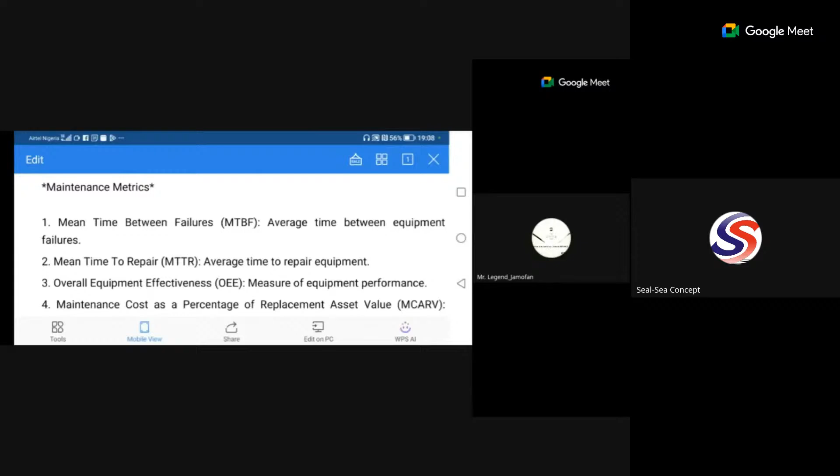So let me share the screen from this other device. We will look into this calculation very briefly. I think I still have the page. So we'll look into this calculation together. I really want you to please give me your undivided attention in order to really get this calculation once and for all.

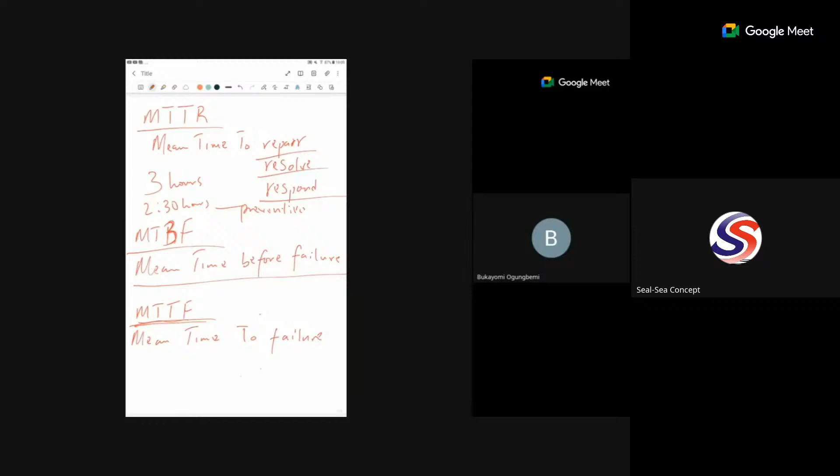So I'm going to be using some illustration. I explained yesterday, some people will call this mean time - you can see it as mean time between failure or before failure. Okay, so I choose to call it mean time before failure. So let's first deal with what mean time before failure means.

So let's say we have a machine that runs - the uptime of this machine is actually 10 hours. So I'm going to write that uptime equals 10 hours. So the company actually proposed to run this machine for 10 hours. And let's say within that 10 hours, we have some failure that occurs. Let's say failure, and let's say this is downtime.

So the first failure occur, and we have another failure that also occur here. This failure that occur here lasted for 2 hours, that's the downtime. And the failure that happens here lasted for 1 hour.

So from this, we can easily see that our total operation time will definitely be that. Yes, our uptime, or let me say our proposed production time, let's use that so it will not mislead us. This is the operation time. The company actually wants to run this. They need this machine to run for 10 hours.

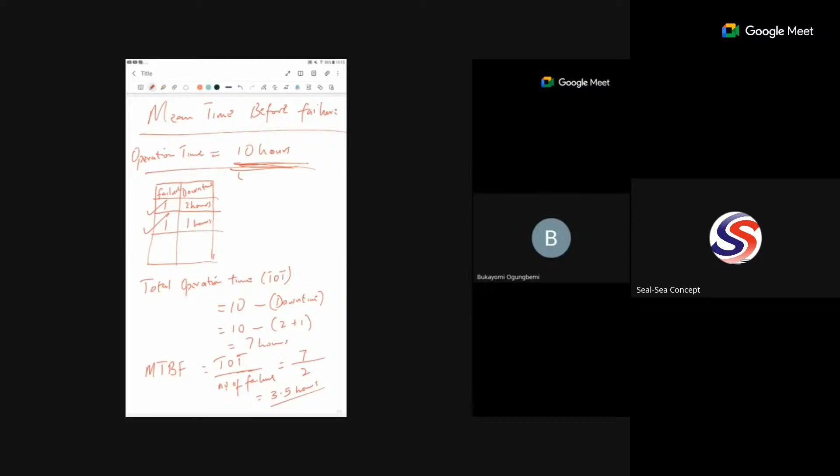By this calculation, this is how a company actually predicts the reliability, this is how they calculate the reliability of every machine. Every manufacturer also does this. And sometimes when you are talking about industrial machines, we care so much about MTBF. But if you are talking about consumer goods or consumer machines, most of our domestic machines, most of us don't really look at MTBF. We don't really care, because we don't need them to run for a long time, okay? Or we are just looking at the low cost of that particular machine.

But every company wants to know for how long can this machine sustain me. So you can imagine what is the interpretation of this now. It means that this machine will always fail at every 3.5 hours. Once this machine runs for 3.5 hours, it will fail. That's what MTBF that we have calculated actually means. So it means that the reliability of this machine is based on 3.5 hours. That is, this machine, when you power it on, when it runs for 3.5 hours, it will just go off, it will fail.

So we are using hours to calculate this. So in case the hours become much and we run it into days, that's when the company will say, okay fine, we have known that this machine will fail every 3.5 hours. Don't forget, every 3.5 hours, this machine will go off. Then we go to preventive maintenance. So on this machine now, we explained yesterday that preventive maintenance is a scheduled maintenance. So because we have known that this machine, every 3.5 hours, it will go off, and mind you, we needed this machine to run for 10 hours, in order for us, if we don't have a better machine to replace this machine with, we can now say that every 3 hours the machine must be shut down for maintenance. So you see that.

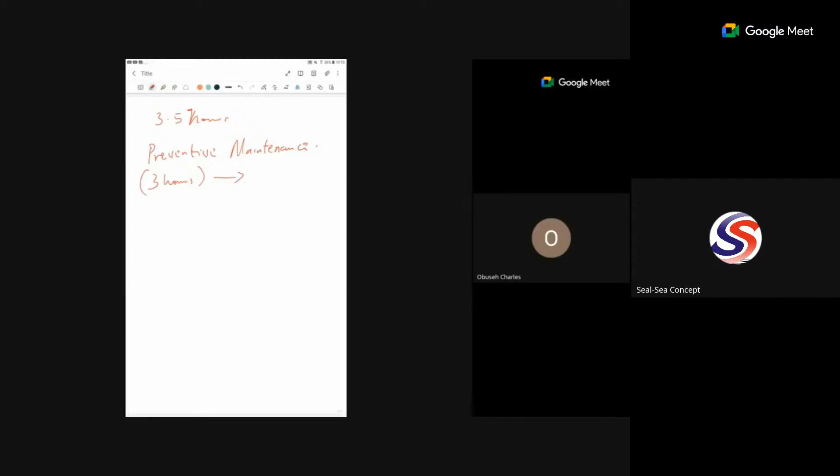So we have already set the preventive maintenance schedule to be just before the time that the machine will fail. That would make us, if we are the one that shuts down the machine on our own, check what is making this machine go off. Maybe we already know the oil level always goes below normal, so we stop, we clean - maybe there is dust covering a particular contact or anything - we clean it, then we start our machine. Then we are sure the machine will still run for another 3.5 hours. So before it runs for that 3.5 hours, in the next 3 hours again, we shut it down.

In some companies, you see some machines whose own cycle is 3 days - okay, they shut it down. If you are in charge of maintenance in your company, or familiar with the time they normally shut down machines for maintenance, I would love for you to share your experience. So there are some machines shut down every 3 hours, every 3 days, every 4 days. But how do they know that this one should be shut down after 3 days? How would they know that this one should be shut down after 7 days?

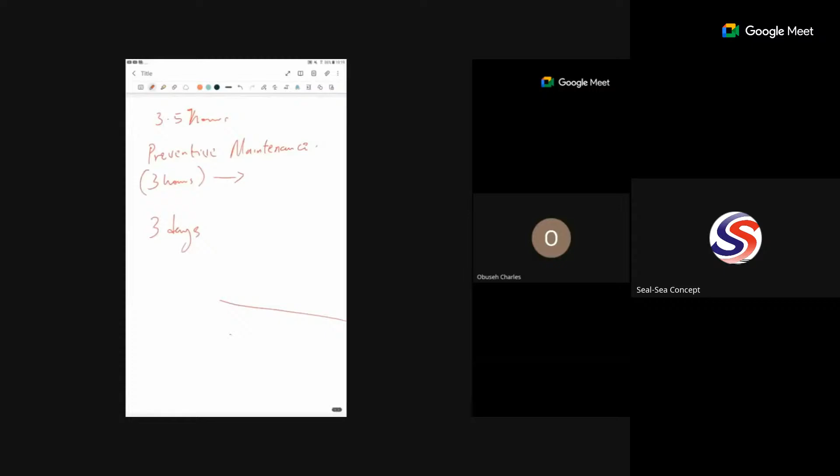That's because there has been calculation on MTBF, which is mean time before failure - what is the average time that the machine will run before it fails? So what happens when you see a machine with low MTBF? For example, if you see a machine that has MTBF of 3 days, and you see a machine that has MTBF of 7 days, which of them is a better machine?

So that's the question I'm asking. If a moderator is there, fine; if not, no problem - just raise your hand, I'm here with you. Anybody that wants to answer that question? With MTBF of 3 days and a machine of MTBF of 7 days, which one is better and why? Okay, do we have anyone who wants to attempt that?

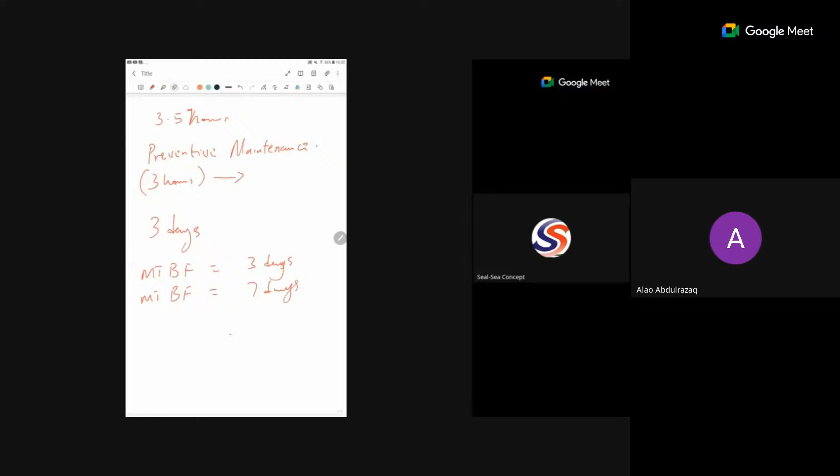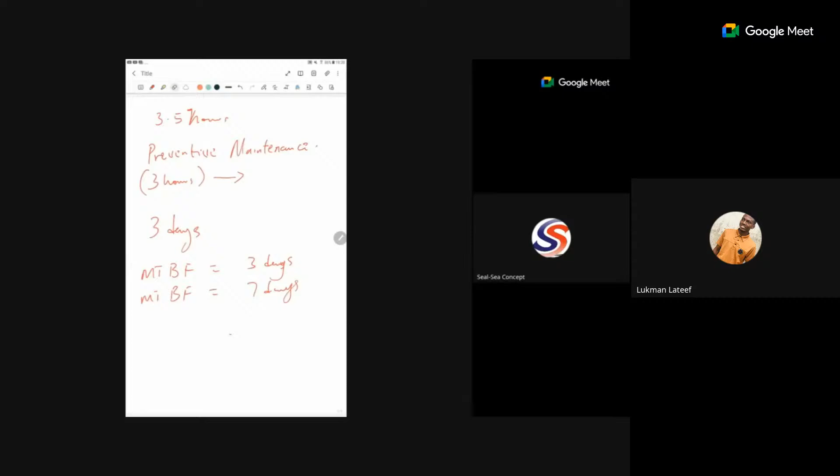But based on the question, my own response is MTBF of 7 days, because for a machine to run 7 days before needing maintenance, it is better than a machine that would run 3 days and need maintenance. Okay, thank you very much for your response. Let's continue with our class.

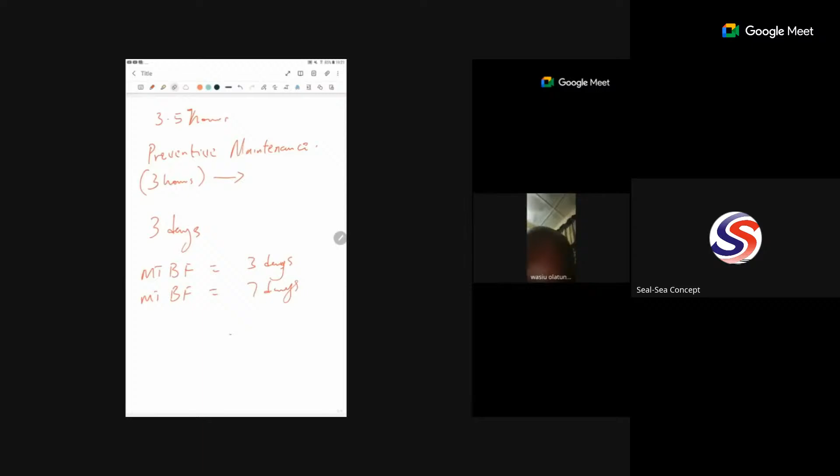So that's about MTBF of a machine. Now let's talk about MTTR, which is mean time to repair. I explained this a bit yesterday.

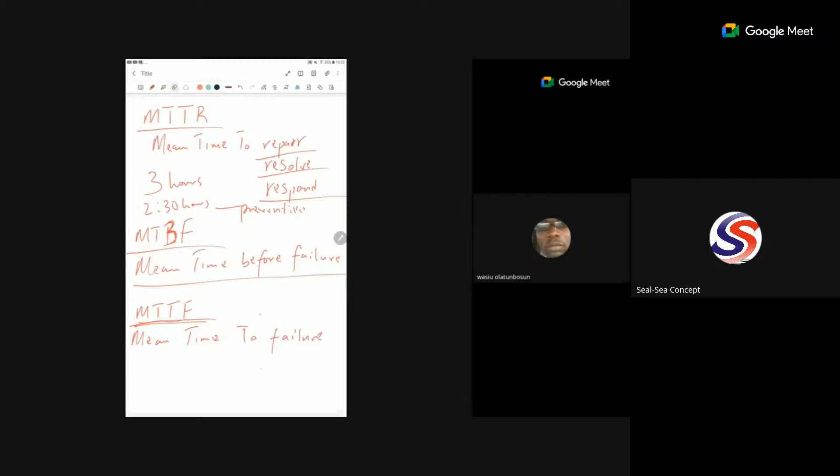Let me give an illustration. Let's say we have a company whose operation within a week is 40 hours. This is their TOT, total operation time, 40 hours. And within these 40 hours, they had 4 failures.

Let's call them incidents instead of failures. 4 incidents actually happened, which means 4 downtimes. So this is their total operation time for 1 week, they were on for 40 hours, and they recorded 4 downtimes.

But the total time it took them to resolve these 4 failures - failure 1, failure 2, failure 3, failure 4 - the total time it took to resolve them is actually 1 hour. When they calculated how long it took to bring it up the first time, second time, third time, fourth time, and added all the time together, they saw it was actually 1 hour.

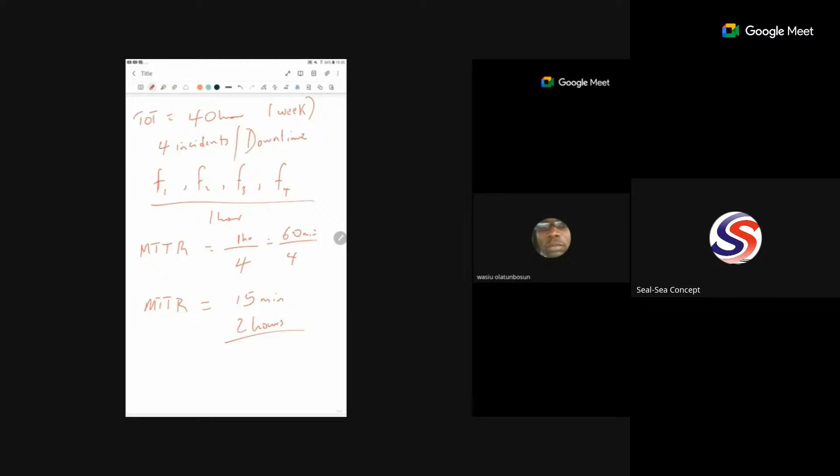Because by the time the fault happens, it will always be a major fault. When the temperature is high, the machine is supposed to shut down, but it doesn't, it continues to run and run. By the time the machine is actually shut down, the high temperature must have spoiled and damaged many things inside, and there will be a whole lot of work for you to bring it back up.

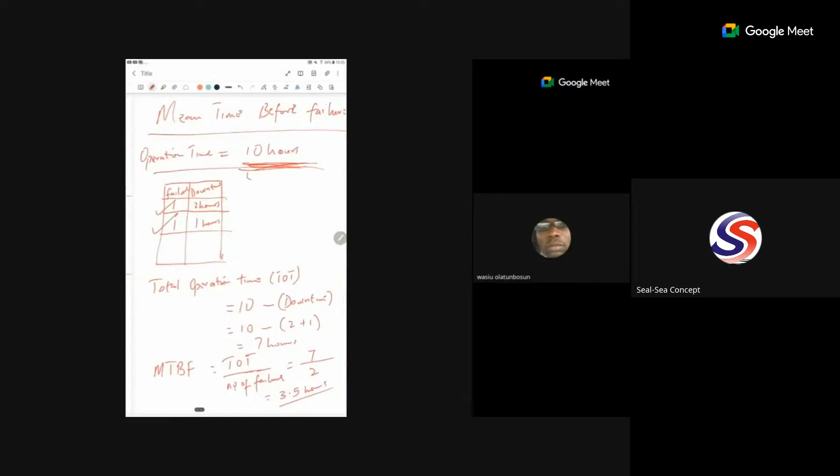So that's MTTR. Let's take the third one, which is MTTF, mean time to failure. Mean time to failure is normally used to calculate the lifespan of a machine.

If you check your car's speedometer, it will show you how many kilometers your car has actually traveled ever since it was commissioned. So we use this to know a better product. For example, this product is made by this company, another product by this company, and both serve the same purpose.

Let's use the example of a bulb. This bulb is made by company A, this one by company B. We want to know which of them has a longer lifetime, and if we calculate their mean time to failure, we'll be able to know the better one. To do this, we take a sample, say 4 samples of A. If you want a more accurate result, of course, you should use more than 4 samples, but we'll use 4 samples of A.

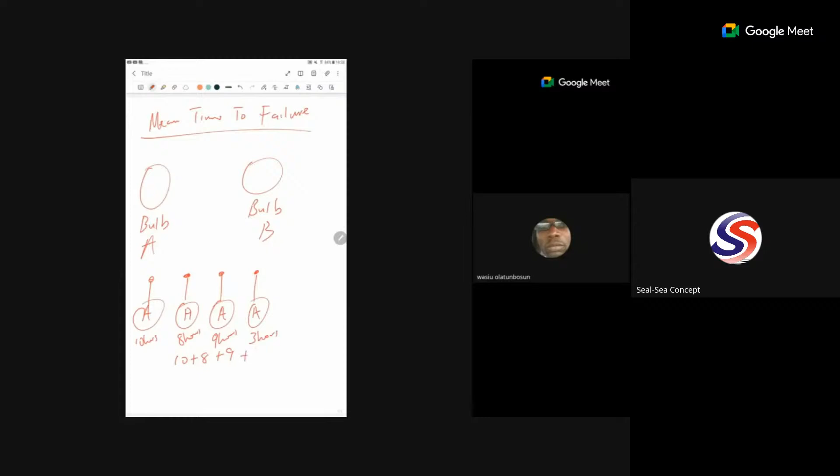So we want to know the mean time to failure. So we then have 10 plus 8 plus 9 plus 3 - should we use 3 or let's just use 9 still? Okay, 9 divided by 4. So if you calculate this, it will give us 36 divided by 4, and then that will give us 9 hours.

So it means that whenever we are purchasing this bulb, we have a level of confidence that the bulb will spend only 9 hours and then it's going to blow up. So the lifespan of this bulb is actually 9 hours. The mean time to failure of this bulb is actually 9 hours.

Let's say we now see another bulb, bulb B. By the time we calculate the MTTF of bulb B, we do the same thing, the same way we get the sample here, and this one now gave us 15 hours. What does that mean? If you have to buy, as an engineer, any of these bulbs, which one will you go for? Is it company A or company B?

Anybody, just raise your hand. Let me see who is following us. Which one will you purchase? Is it company A or company B? Okay, Akawe Jude, you can unmute your mic. Yeah, can you hear me? Good morning. Yes, please go ahead.

Yeah, I'll go for company B. Okay, why are you going for B? Because it has more lifespan than company A.

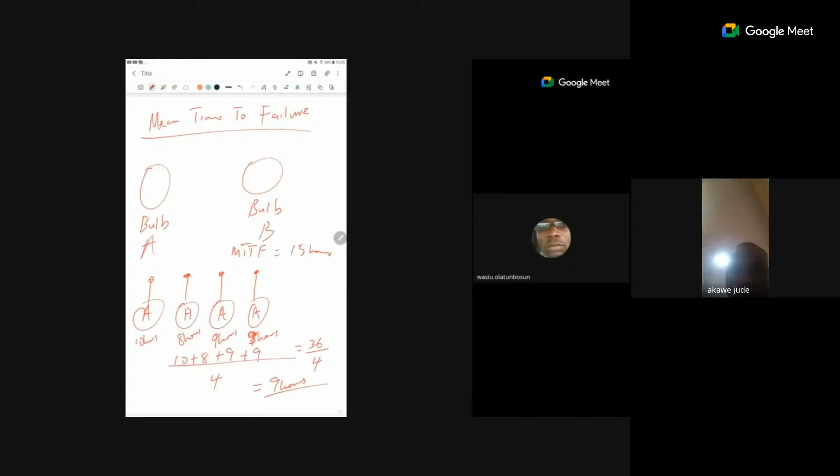Okay, thank you. Boyisola Giwa, you have any alternative response? Boyisola Giwa. No, I don't have alternative response. Okay, thank you very much. Let's move on.

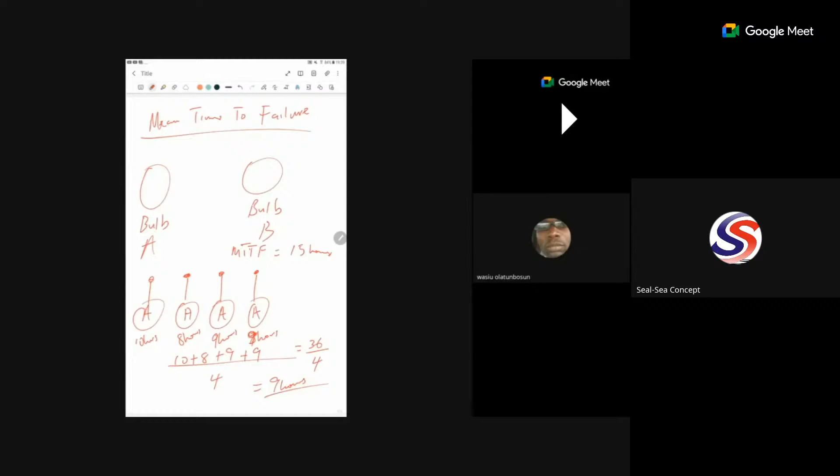Anybody? Moderator, are you there? Mr. Moderator, are you there? I am here. About Akwan, you can unmute. I'll buy one of company B.

Because the mean time to failure is 15 hours, while the mean time for company A is 9 hours. What does that mean? So it means that the average time for bulb B... it can fail is higher than the average time for A to fail. So I think I will have more time to use bulb B than the time I use bulb A.

Thank you so much. So this is how you see why people like this product - it's not just by mistake, it's something that you can also try. These are experiments that people actually do. They intentionally find a study, if it is a bulb you are using - I'm just using a bulb for example, it might be a different kind of machine. You just want to know how long it will actually take before this machine packs up.

So you see some companies that normally do new editions of their product, like they normally improve on their products. All these companies that make cars - you say, oh, this is Honda, so they will make another advanced one. These are the things that they actually improve on. So they want to improve on the lifespan. Sometimes they use the MTTF of the last version to actually create the new version.

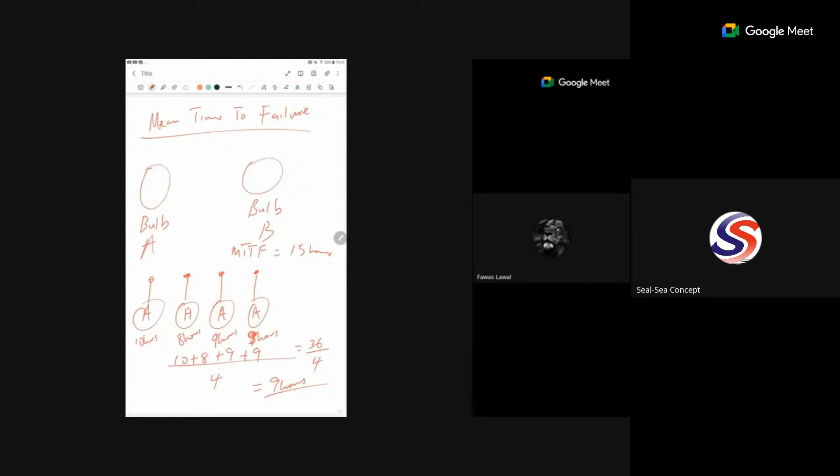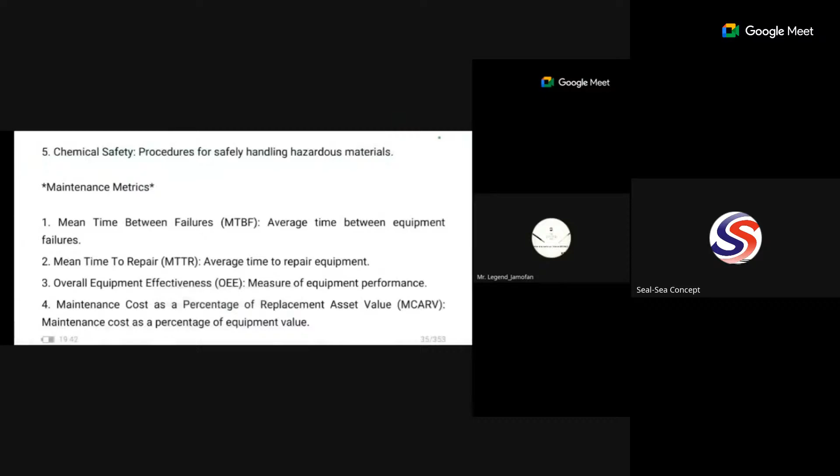So this is what we discussed, to the extent we discussed it. Yes, there are so many things for us to discuss.

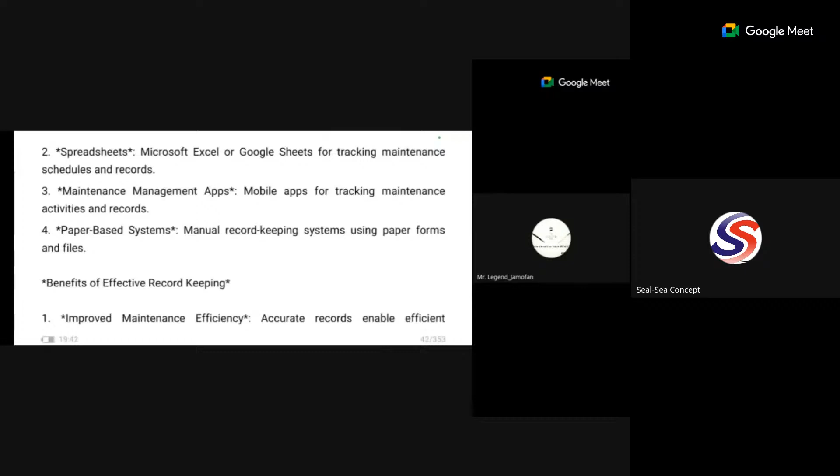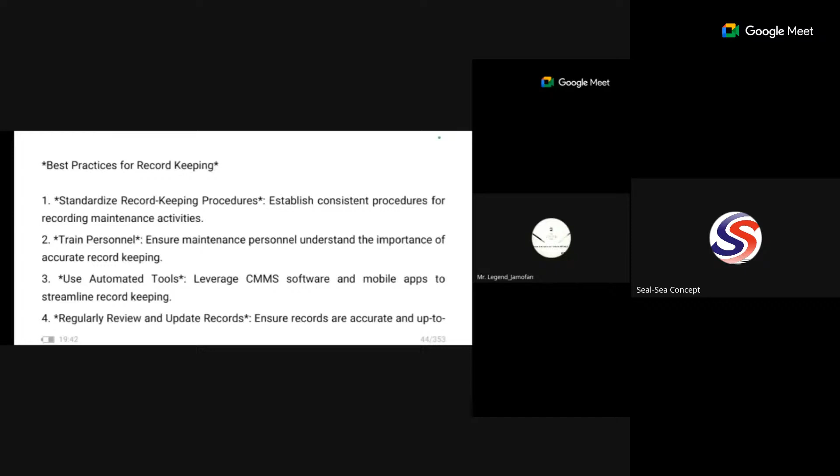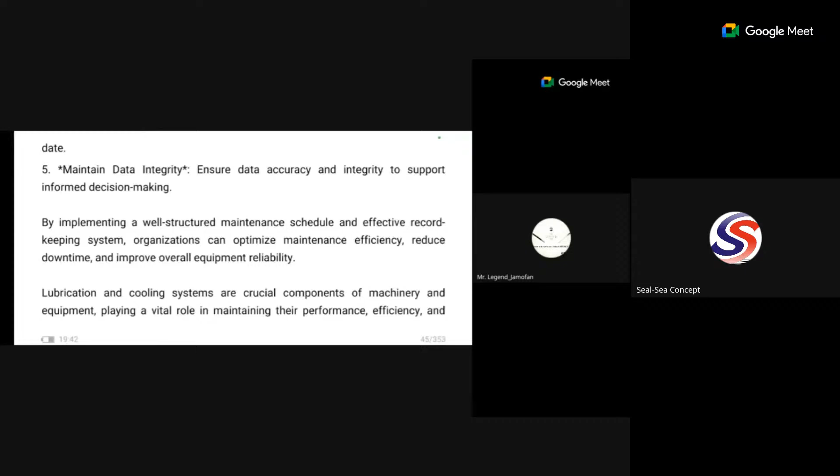I've run through the types of maintenance. And yesterday we also discussed the benefit of effective record keeping already, best practices for record keeping, where I was talking about CMMS. It's a software that makes you automatically schedule maintenance, and you'll be able to attach the name of the personnel in charge of that maintenance.

So let's move on to discussing the lubrication system. I briefly mentioned it yesterday, but we want to elaborately look at what lubrication system maintenance in machinery actually entails, because it's part of the things you touch when it comes to maintenance.

The first thing you need to understand about lubrication systems is that we use it to reduce friction in machinery. Talking about friction, since we have a lot of engineering-oriented people among us, friction happens when a metallic surface - let me use a metallic surface since we're dealing with machines - when you take two metals and rub them together, there will be a restriction in their movement.

Imagine you take two spoons in your kitchen and rub them on each other. Notice that effect. Now take those same two spoons, get some palm oil or groundnut oil, rub it around them, and try rubbing them on each other again. What do you notice? You can try this out if you haven't practically seen the effect of friction before. Take two metallic spoons, rub them on each other, feel the movement, then put oil around them and try again. You'll see that when you apply the oil, they move much more freely on each other - that's how you reduce friction. It's that restriction of movement that we call friction.

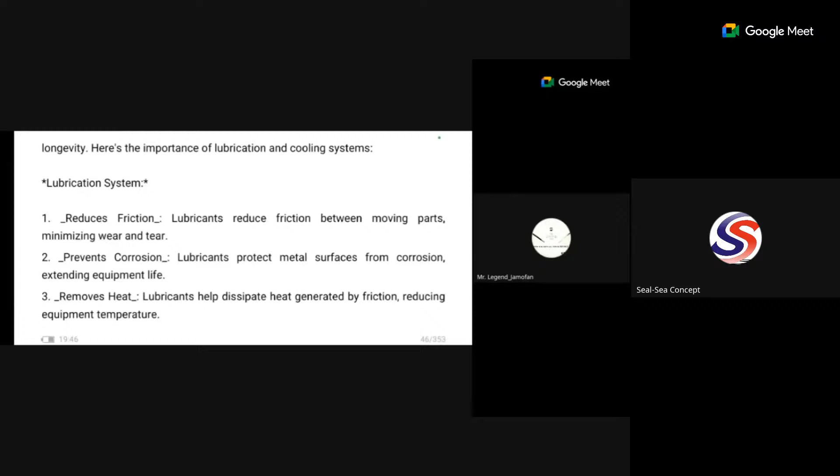Lubricant also helps remove heat. Many of us even practically do this - if you sustain a burn at home, you may quickly get palm oil and dip that burnt place in it. Why? Because you believe the palm oil can help extract heat out of that burnt place. So some of these lubricants are also for removing heat from machinery, because excessive heat will always damage some part of the machine, so we want to apply lubricant to remove it.

Some of these lubricants are also meant for cleansing - I explained this in the last class. They can remove debris. Let's say some part eventually wears and tears; this oil being in the system can separate some dirt from such a system and prevent further damage. And eventually, applying the lubrication system...

Making the lubrication system intact will also help us improve the efficiency of the machine. What is efficiency? When you reduce friction, you use less energy. Energy consumption will be lower, because the machine won't have to struggle to overcome friction, to overcome the opposition, to overcome movement that is not smooth. The machine will not struggle to move, the rotating part will not struggle to rotate. So if there's no struggle for them to do all this, you'll need less energy to rotate them.

That will also help your power. You can see what power generation is actually costing right now. You can't really imagine what many production or manufacturing companies who have to provide their own electricity may actually be going through right now, especially in this part of the world. So if there's anything you need to do, it's securing the lubrication system of a machine in order to use less energy. Of course, why wouldn't you do that as an engineer?

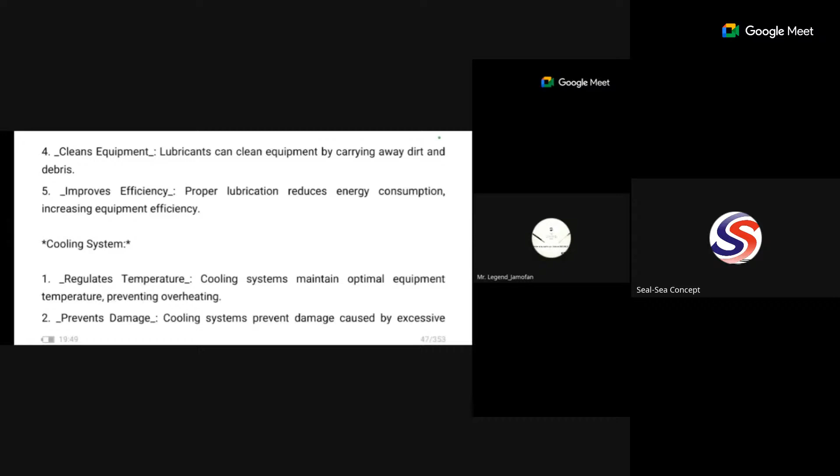When you look at your electric motor, you can have overheating, you can have insulation failure if the cooling fan actually fails. So when it's overheating in a machine, if there's any part that is insulated, the insulation will break down. All those wires used to coat your coil inside your stator, your armature, everything will burn. And once one phase is already touching the other phase, there will be a problem. There will be a short circuit in the machine, and then the machine will have to shut down.

So the cooling system regulates the temperature, and by regulating the temperature, it will prevent damage, because high or excessive temperature will actually damage the part of the machine.

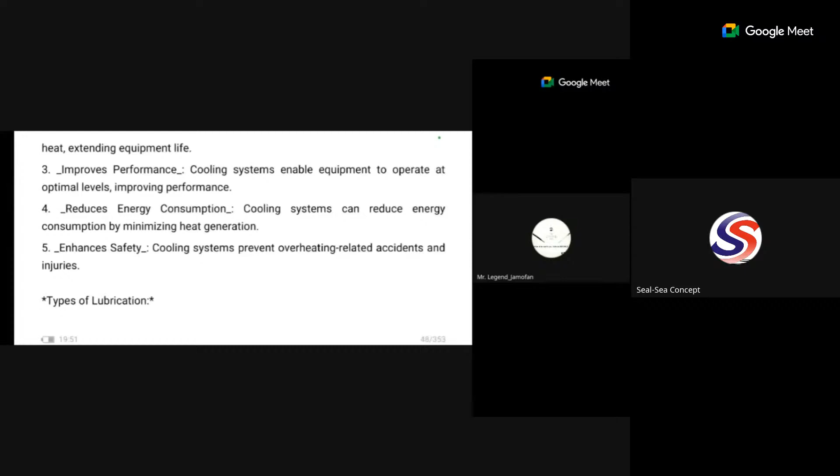And this will also improve the performance of the machine, because when the machine is not overheated, of course there is no way a machine will work without some part of it generating heat. But what we are saying is that the heat it generates must be machinery friendly. As humans, our body also generates heat, but your body must not generate too much heat such that your internal organs would not be able to bear it. If you as a human understand that, think about machines also. When there are moving parts, no matter how you work on reducing friction, there will still be some level of heat in the machine, but it has to be friendly to the machine.

In your maintenance, you must have seen different kinds of lubricants being used. Some machines make use of oil for their lubrication. There is a peculiarity of machines that use oil for their lubrication - for example, heavy duty machines like your tractor, your forklift. Most of them make use of hydraulic as their power source, and anything that is hydraulic uses oil. Oil is actually the one generating power there. The forklift, the car lift, and all that I showed you examples of yesterday, they use oil because they work on hydraulics, and oil is also used to lubricate them.

When you look at some machines, they make use of grease for their own lubrication. You can use grease if the moving part in that machine, or the part that is supposed to be lubricated, is not easily accessible - not something you can access from time to time. You may have to use grease for that part, since it is a place in the machine you cannot go to frequently to lubricate.

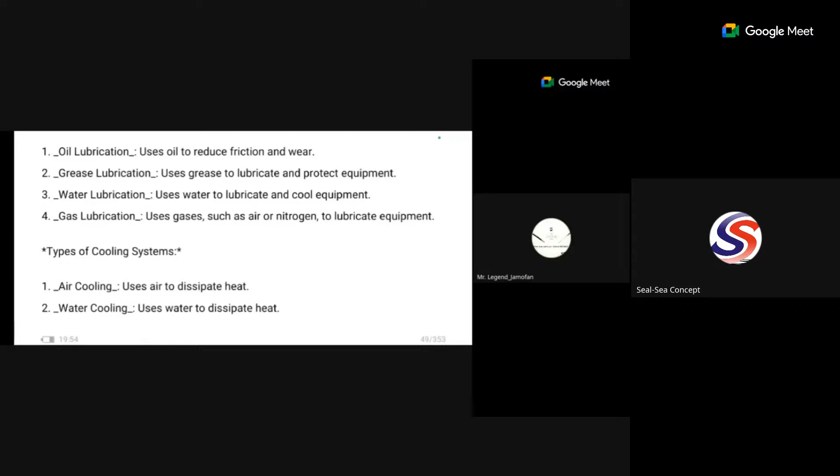We have some cooling systems also. I've mentioned air cooling system. We have the water cooling system. We have some that make use of oil to cool down. We have evaporative cooling, and the last one is heat exchangers. Of course, if you know the working principle of your air conditioner, your fridge and your freezer, these actually make use of heat exchangers.

Your AC in your room, you will feel cool inside the room. But what happened? The AC is just extracting the heat in the room, and then that heat is evacuated out. That's why when you go to your radiator outside, you see that it will be hot outside, and inside will be cool. It's just extracting the heat.

What is that particular coolant inside it? It is gas. So when the heat inside the house heats up the gas, it will expand. And then when it goes through the circulation, it will reach the aspect of the fan. The fan will extract it. That's your radiator fan, we extract it out. Those heat will escape through the radiator, and then the gas will go again, get heated up again.

The heat will be extracted out. The gas will circulate again, get heated up again. Why is it becoming heated up? Your breath inside the room, the little heat that is inside the room, until the temperature of the room actually drops. And then you say it is cool inside and hot outside.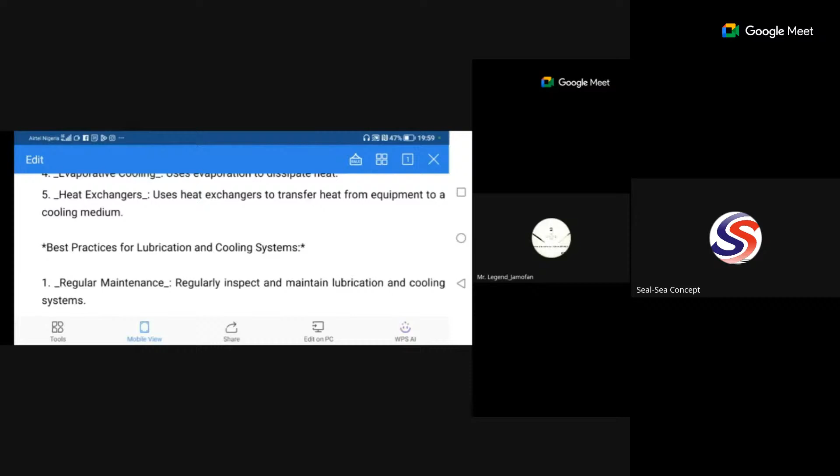That's what I'm saying, and that's regular maintenance: regular inspection, regular lubrication, regular improvement on the cooling system or monitoring the cooling system. It is very, very important. That's the best practice for lubrication.

Another thing is that when dealing with lubricants and cooling systems, you have to be careful when selecting the lubricant itself. Many of us don't know that the best lubricant to use depends on the manufacturer's specific recommendation. There's a specifically recommended lubricant for every manufacturer. One day, I went to a mechanic workshop, and they just told me they had to change the oil.

Meanwhile, it was an emergency breakdown of my car that made me go there, and he's not really the one that normally works on my car. So when I got to the actual workshop where they normally maintain my car and told them they changed the oil, the guy in charge of my car was very, very angry, asking why didn't I call him. He could have come or spoken with them before they changed the oil. In fact, I was so shocked.

I actually bought a very good product, but he said yes, it's a good product, but it's not the one recommended for my car. So a lubricant might be good, but is it the one the manufacturer actually recommends for that machine? You need to check the manual and be sure about the lubricant you've chosen. Many companies don't do this, they just say 'that's what we use' and put it in, and the repercussion is that it will definitely affect the lifespan of the machine, whether you like it or not.

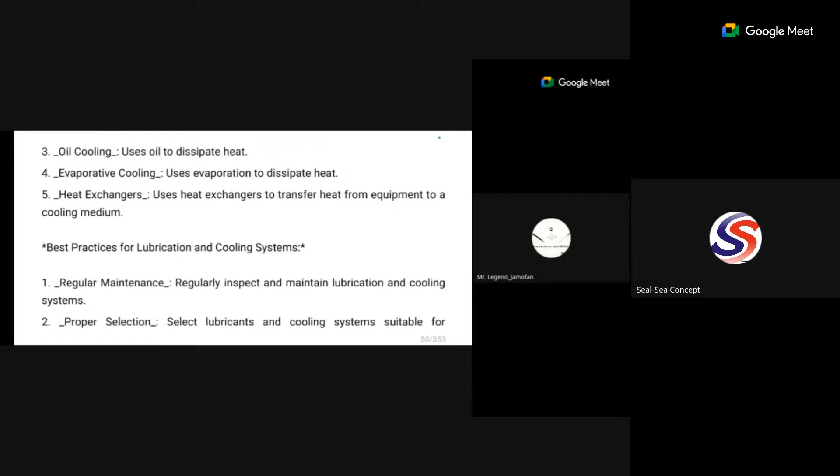And they will even label it like a known product. So if you care so much about maintenance, you have to be really careful when selecting your lubricating oil. Proper selection is important, monitoring is important, and you must be sure there's no contamination in the oil. If even a little amount of dust gets poured into the lubricating oil, trust me, it can cause problems in the machinery system when you pour it in.

If there's a little amount of water that mixes with it and you still pour it like that, trust me, it will have a negative effect on the machine. So it is very important.

Not everybody can lubricate a machine. People should actually be trained. It is a simple thing, but you have to be trained. It takes people who have actually been doing this to know the repercussions and to adhere to the instructions of the manufacturer.

Many of us have seen this mechanism before. I want to draw something. If this is where you need to put the lubricating oil, when you watch very well, the container can be as much as this, but you will see low. In fact, in your car, if you check your engine, that's where we have the gauge. If you check the engine oil level, you will see that gauge is actually marked. You see the mark here, you see the mark here. That is the lowest level that your oil should be, and this is the highest level.

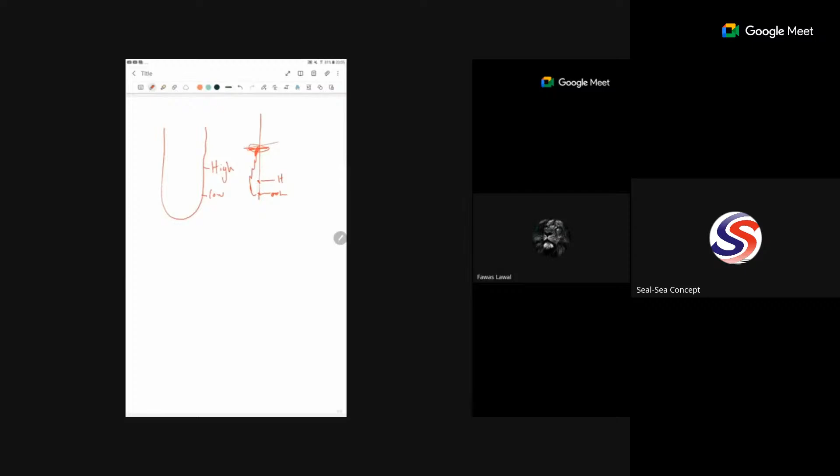Now translate that to a machine also. The oil level, you have to check the level it must be in the mechanism, so they always mark it. Check it very well. Any machinery that you see where you have to put the oil, there are always guidelines on the level of the oil. Don't be deceived by the container that, oh, it's very big, it can overflow. That's not what they are saying.

Why do you have to put it at this level? Because when the oil is actually heated up, it will still expand. The viscosity will reduce, and it will expand. So the allowance has been given. This allowance that you are seeing up here has been given for the expansion to occur. So imagine what will happen if you fill it here and the oil is actually heated up.

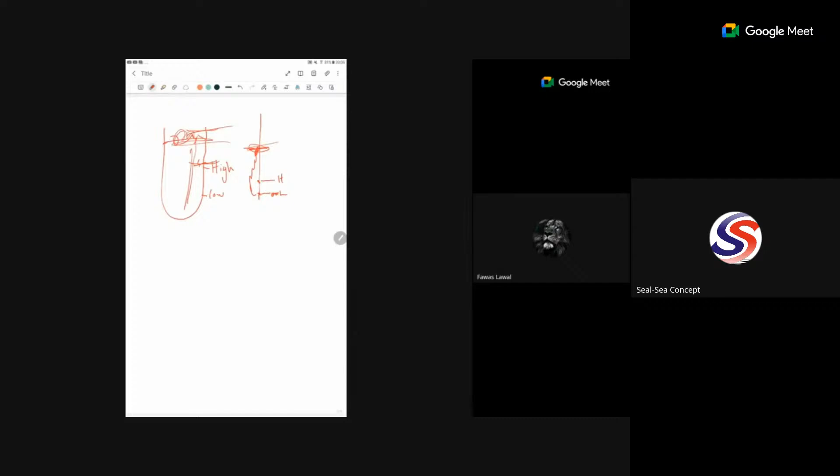There will be spillage. I've heard of somebody before whose oil actually spilled and entered the dashboard of his car, entered everywhere in his car. That might not actually be because of too much oil, but it must be something, either the oil mechanism in the car is not well tightened, or it overflowed, or anything whatsoever.

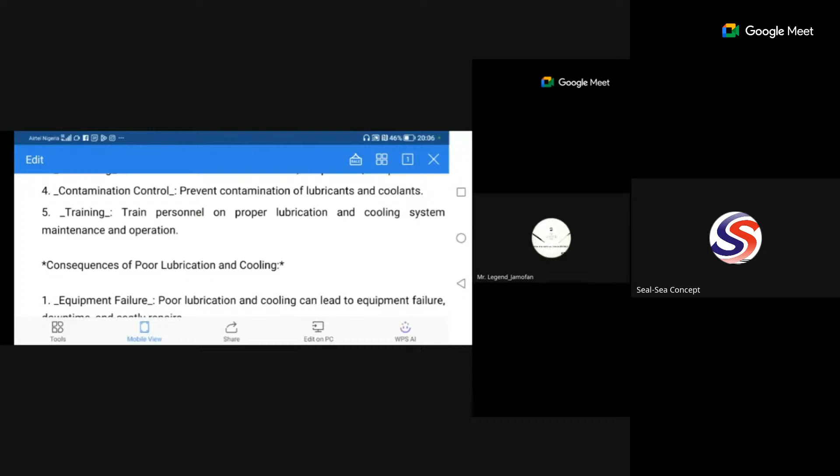So you must always check the level, and that is why I was explaining that the personnel that will do this must be trained. You can't just say anybody can carry on and gauge the oil of that machine or car, you can kill that particular machine. It is somebody that is experienced that can feed a baby, so just see it that way. People must be trained to do that.

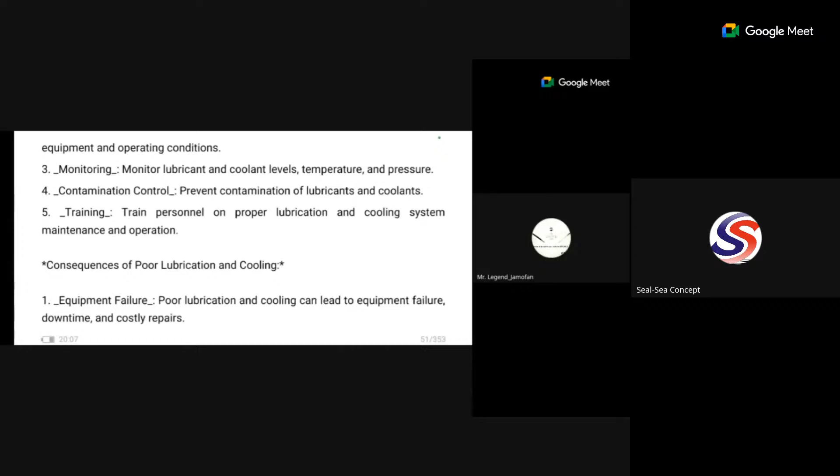So you monitor and then you train the personnel. What are the consequences of poor lubrication and cooling? Equipment failure, there will be equipment failure. Of course that one is guaranteed because there will be wears and tears.

Too much heat in the system will make some parts of the machine damage, and it will definitely break down. The efficiency of the machine will reduce, there will be wears and tears, and most importantly, there will be risk to your health as a person.

Even there will be a negative impact on the environment where you work. So all these things are very, very important.

There are some parts of the machine that if you do not maintain them, the noise level will not be low, and the machine will make too much noise. Whose ears will it affect? It will affect your ears, because there are operators that stand with their machine 95% of the time they work in the factory that day. They cannot leave that machine because they have to be on observation, even when they have already set the machine to work.

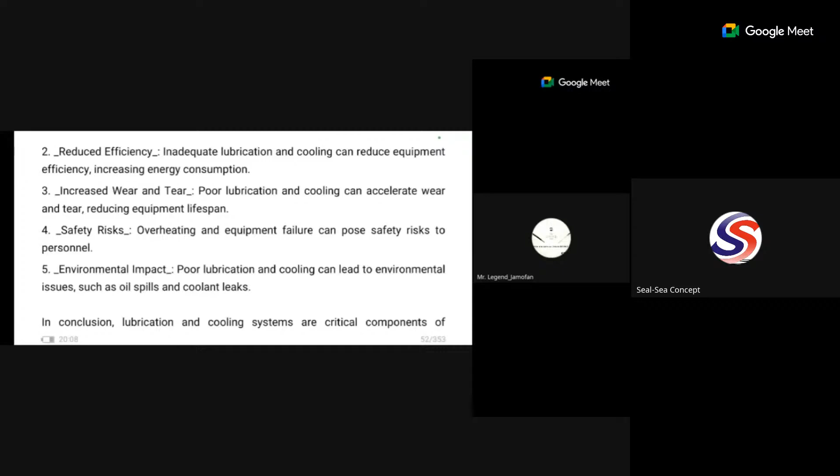There are some shifts that are 7 to 7, that's 12 hours you are using to work. So if you use your 12 hours to listen to noise higher than the level of decibel that should enter into your ears, and you do that every day, you can imagine the damage that will cause to your safety. So it is very important for us to look at this.

Now, the next thing we want to look at in our industrial maintenance, machinery maintenance, is for us to have an overview of some tools, some tools that you will need for your maintenance. It is very important.

Anybody here who normally performs maintenance on a machine? Do we have people here that perform maintenance on machines? Please signify if you have performed maintenance on a particular machine before. Anybody? Any maintenance engineer here? The machine that you use, those people that spoke to me in the last class, don't you perform maintenance on your machines?

Okay, is there any engineer in the house? I'm going to call people myself. Is there any engineer in the house? Yes, sir. Okay. Abdullah, yeah, okay, I think you will drop the line now. Engineer Abdullah, is that Abdullah? Who said yes, sir? Engineer Daniel, sir. Okay, thank you so much.

So you perform maintenance. Tell me some tools that you use during your maintenance. What are some tools that you normally go with when you want to go and perform maintenance on a machine? Are you there? Yes, sir.

Tell me some of the tools that you normally use for your maintenance. We use spanners, set of spanners, set of screwdrivers, mallet hammer. Can you hear me? Can you hear me? Are you with us, Engineer?

Okay, all right. Yeah, we can use stethoscope for testing. What's the nature of your work? Electrical engineer, mechanical engineer. Mechanical engineer? Electrical engineer. Okay, so what do you use in your own maintenance?

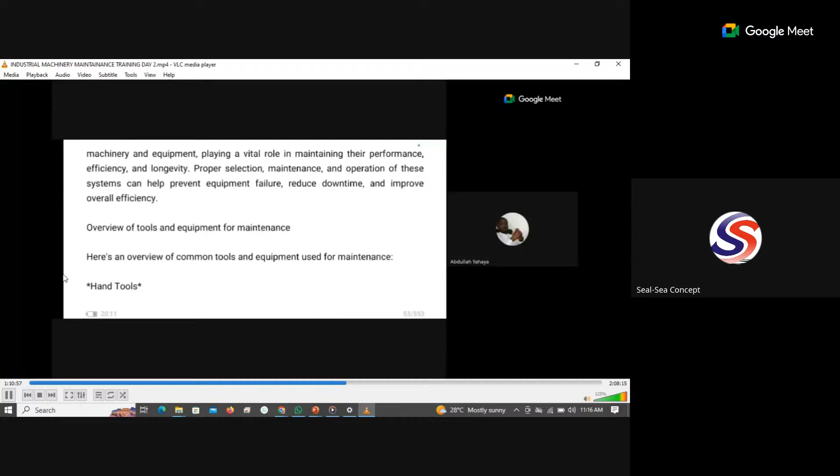What are the tools that you use? I use stethoscope for testing the noise level of motors. I also use infrared cameras for testing the temperature of motors. Good, I love that, thank you. I love that infrared that you even mentioned, I love it the more.

So, any other person? Yes, sir. Can you hear me, sir? Hello, sir. Hello. Hello, can you? Please go ahead. Is that Felix Okon? Felix Okon, you can unmute your mic. Mr. Felix? Yeah, good morning. Can you hear me? Yes, please go ahead.

The maintenance I perform is what we call autonomous maintenance. That's a maintenance carried out by operators on the line. For instance, CLIT. It's what we call CLIT: cleaning, clean your machine, lubricate some moving parts of the machine, inspect, and also tightening using a spanner, depending on the size, either 14, 12, 8, or the case may be.

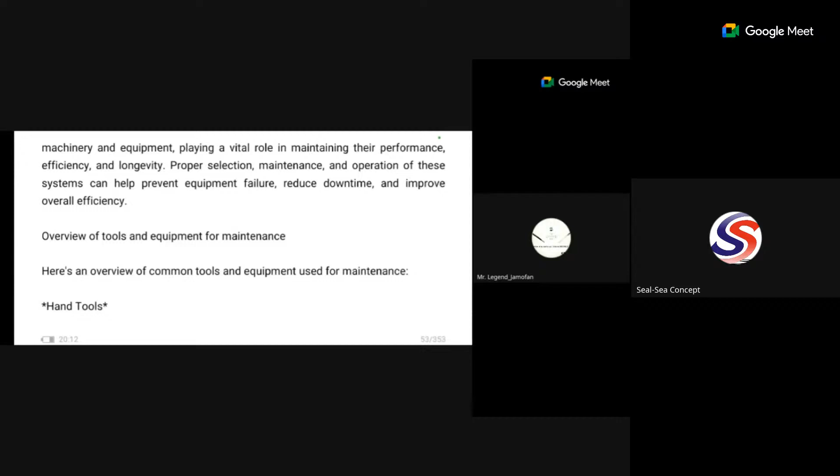Okay, thank you so much. So we look at those tools. The first set of tools are your hand tools: wrenches, some of which can be adjustable, you can have the socket one, you can have the box-end. Some people use pliers, which is a very common hand tool during maintenance.

We are talking about all types of pliers. There are still some electrical engineers that use their teeth to peel wires. This shows that you are not trained, or you are a quack, because it's not proper practice to use your mouth to peel wire. So you need to use your pliers. Very clear.

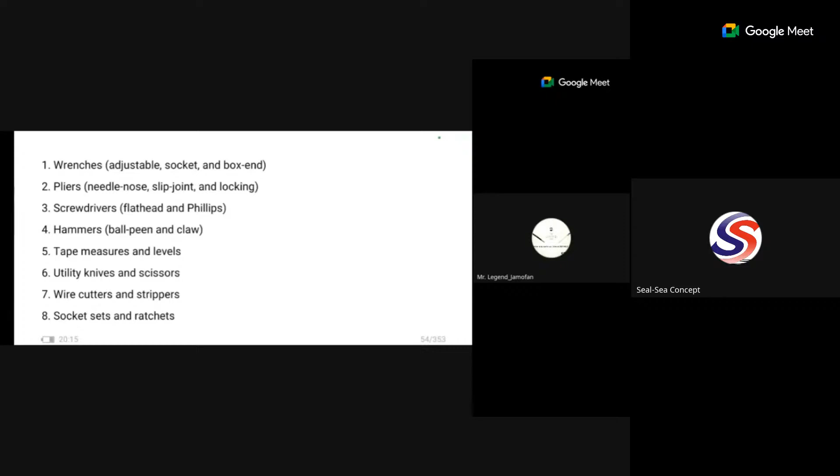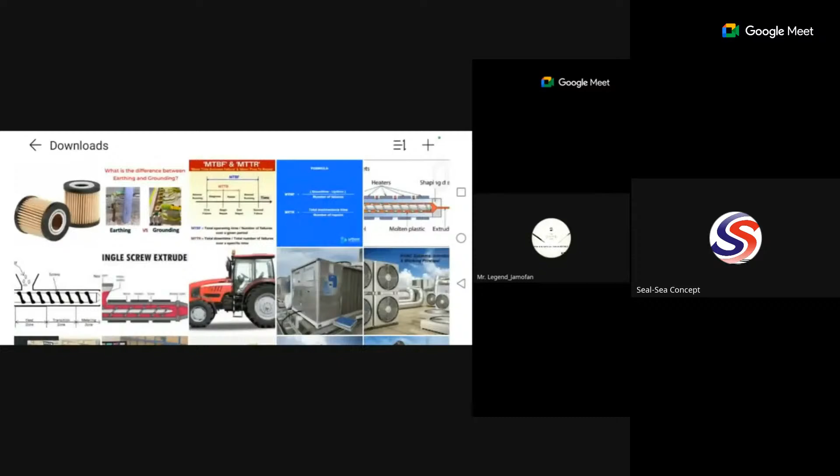If you have seen utility knives before, let me see, I think I have a collection of pictures. Okay, I was thinking I have those pictures. So you see some sets of pliers, screwdrivers, utility knives. Utility knife is for those that normally use their teeth on wires.

You can use a utility knife to peel off the insulator of your wire. There are some wires you may not be able to use a plier on, maybe because of their thickness or the kind of conductor in them. So use your utility knife, just as if you are sharpening the mouth of an arrow, that's the way.

You also make use of cutters. Some people think pliers can do the work of cutters, but in most cases it is not so. Cutters are specifically meant to cut, while pliers are meant to twist. Some pliers have a smaller part you can use to cut, but if you really want to do cutting work during maintenance or installation, you need your cutters.

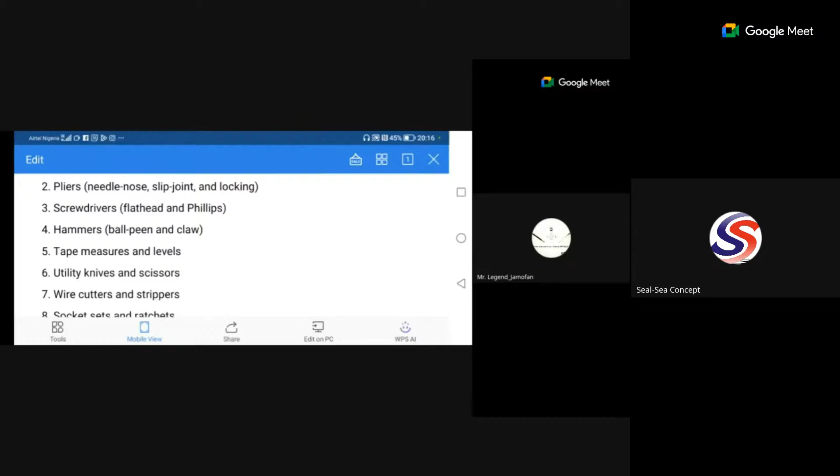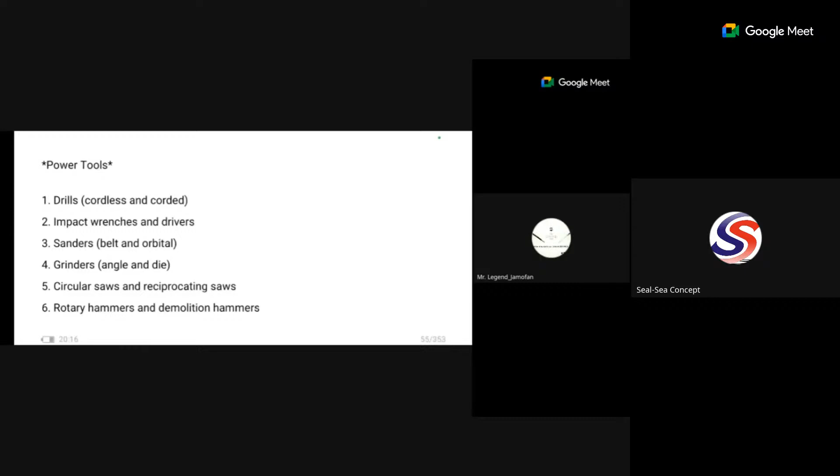Strippers, socket set rather, the ratchets, your power tools. We are talking about drills, grinders, circular saws, rotary hammers. Some specialized tools that you also use, your multimeters.

Okay, this is one of the practicals I'm going to be having a demo with you on multimeters. I'm actually pushing that for our class tomorrow as hands-on. It will feel as if you are doing it with me in the class. Multimeter, your oscilloscopes.

My friend mentioned infrared thermometers. If you have materials being transported on a conveyor belt, or that flow through a conveyor belt to another processing unit, and you want to monitor their temperature, you can use infrared thermometers. There are some that are handheld that you just use on it. But there is one called a pyrometer, I think I'm correct, pyrometer. That one is actually attached, so from a distance it can take the reading of the temperature.

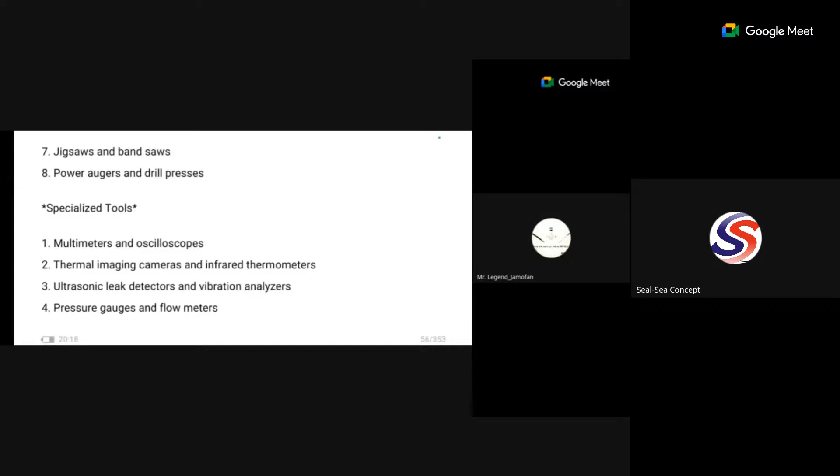So for leakages, you can use ultrasonic leak detectors and vibration analyzers to measure the vibration level, pressure gauges are there, and all this. So we have all these equipment.

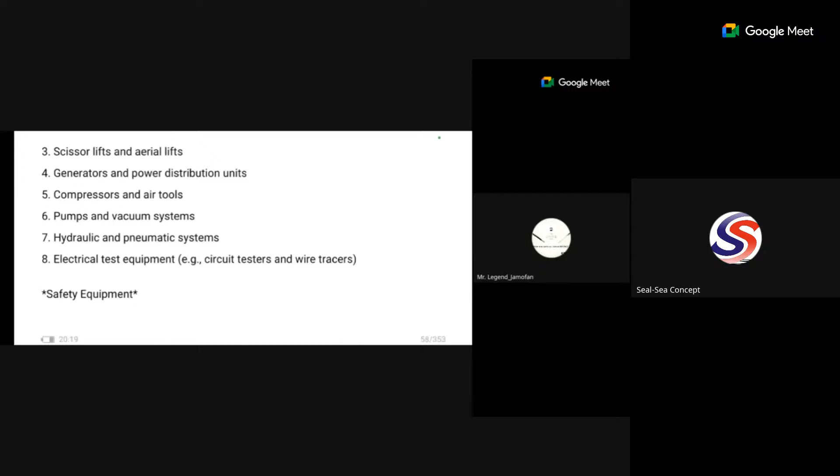The other aspect of maintenance we need to discuss is the safety aspect. In most cases this is actually underrated. Even many guys that are good in maintenance overlook this aspect. I've seen a whole lot of people, and in fact I can testify that I have direct experience, though my own direct experience is not like that of some of my colleagues back then in industry, who God actually saved narrowly. They could have passed away just because they wanted to perform maintenance. These are things you should pay attention to. The safety aspect of maintenance is very important.

When you're going for your maintenance, let me have people contribute on this. What are the things you do as the safety aspect of your maintenance when going for your maintenance? That, my friend that mentioned electric motor maintenance, Daniel, Engineer Daniel, are you there? So what do you do in the aspect of safety when going for your maintenance? What are the things you put in place for safety when you are going for your maintenance?

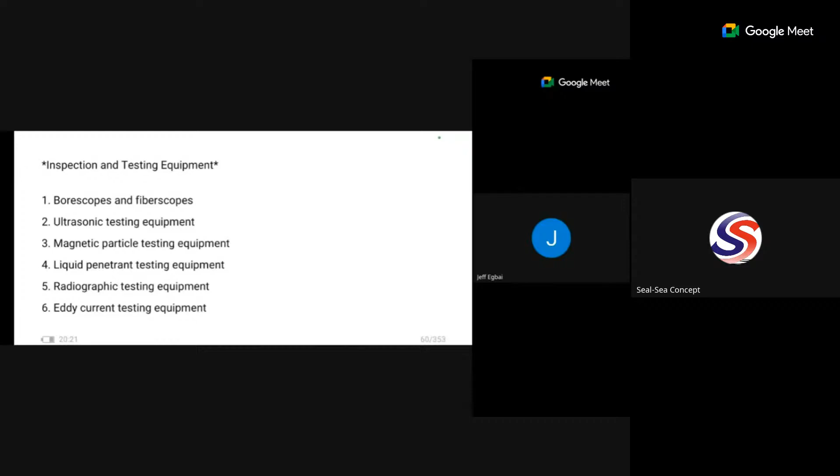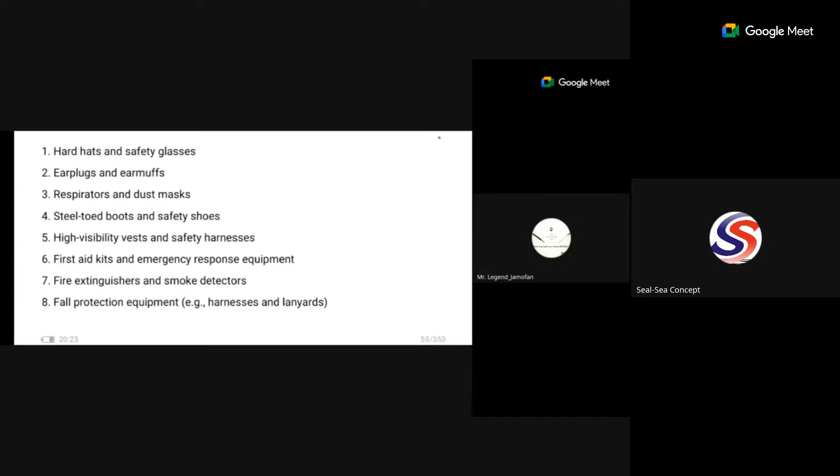Your safety boots. If you know the illumination level of where you are working is low, you have to wear your high visibility vest, or reflective jacket. If you are working at height, then your safety harness, you must actually use it. Your first aid kit when working on maintenance - make sure you have first aid kits close by in case anybody sustains a minor injury, a cut, and all that. Fire extinguishers in case of a fire outbreak, fall protection, your harnesses, I've already made mention of that. So all these are very important.

I'm still going to talk so much about the safety aspect. So what is the guideline? Every maintenance engineer must learn about safety. It is very important, and they must be ready to follow it. They must know the right PPE to use, and they must know how to use them. In our safety training, we train people on how to rightly use their PPE. It is wrong for you to wear your helmet backwards or sideways. A helmet should be worn in a way that protects your head, not just to beautify your head.

It does not matter how you look in your helmet, but what matters is how safe your head is inside your helmet. Likewise, your safety boots - your Timberland is not a safety boot. You have a big shoe that looks bogus, but it does not represent a safety boot, because a safety boot is protected. It is laced with metal to protect your toes from falls and to protect your foot from anything that can puncture you when you step on it.

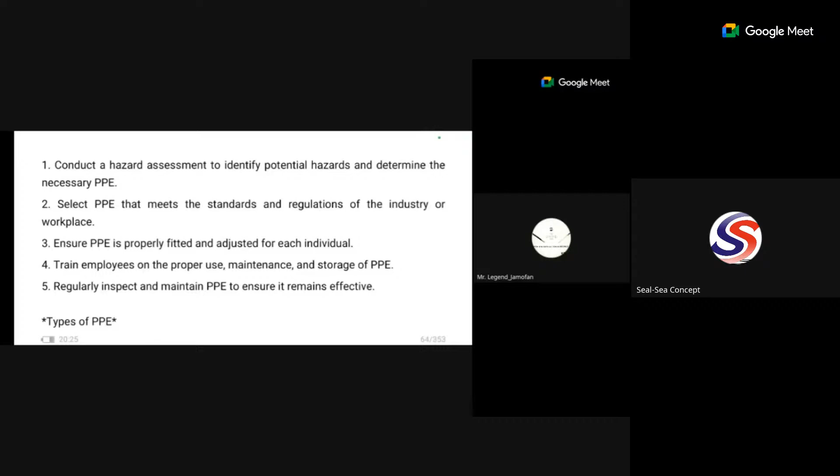So it is important that in the maintenance environment, it has to be cleared. You have to tidy up. If there are iron filings and all that, you have to pack them properly, because anybody can step their foot on it.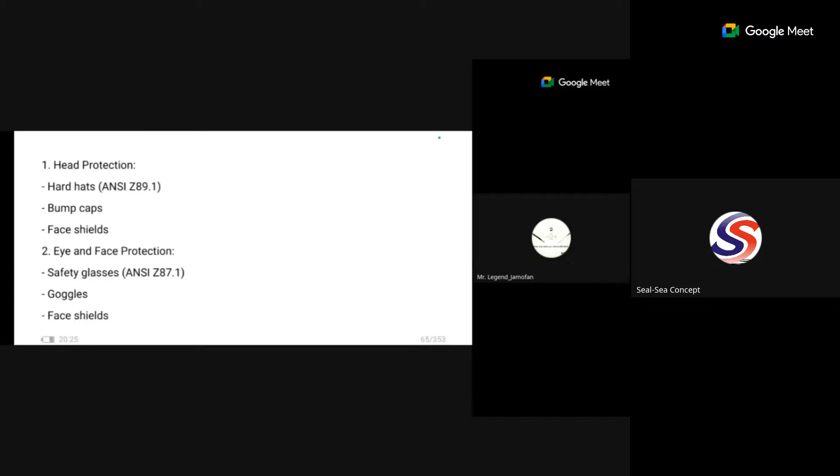So we have head protection, either bump caps - if you go to some food processing company, you will see that the kind they wear is like hair nets. That's to protect the integrity of the product, so that there won't be contamination in the process of making it. So all these are very important, and we have it covered.

Of course, like we promised, you are going to have this material, so we have it covered.

So that will make me talk about the major aspects when performing maintenance, which affect safety and which is part of this process, and that is LOTO. That's what our contributor, the engineer that just spoke, actually contributed on - that they will actually follow the LOTO process or procedures, so that the safety of the maintenance guy will be guaranteed.

Now, what is LOTO itself? We use LOTO to actually secure the lives of the maintenance team, in such a way that there will not be accidental startup of a machine when they are working on it. We use LOTO to prevent a machine being accidentally started while people are working on it.

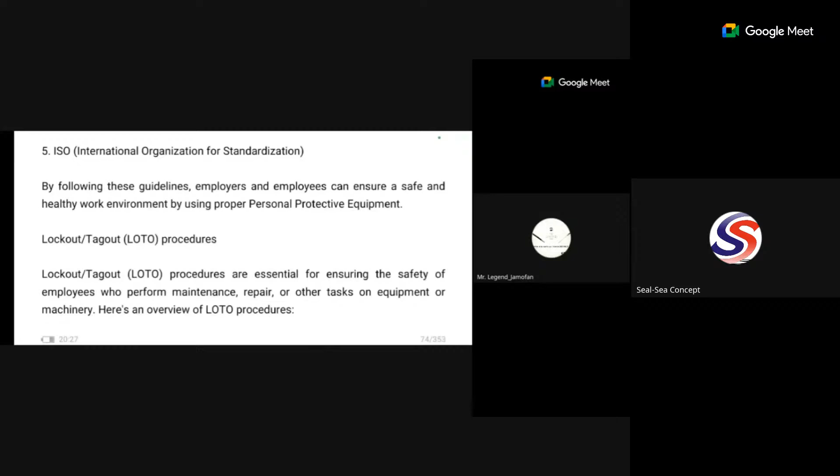Okay, so let me do some analysis. Let me share my whiteboard. I hope you can see this. I hope you can see my whiteboard, right? Yes, yes, it's your whiteboard. Okay.

Lock out, tag out. Now, in most industries, when you want to work on a machine, you already know that this machine is being powered up, is using electrical power. It is wrong for you to perform maintenance on a live machine. A live machine means that this machine is still being powered up. So this is a live machine.

So what do we do? You have to go to the electrical department - I don't know the procedure in your own company, but in the company where I work, they will come to us in the electrical department and tell us that they want to perform maintenance. As an electrical person in charge, you dare not go and shut down that machine. You have to first confirm: is it the preventive maintenance they want to do on the machine, or did the machine actually run to failure, or did the machine actually fail on its own?

So if it's preventive maintenance, you must have known - if they are using CMMS, electrical guys will have access to this CMMS to check that it is true, this machine is due for maintenance. You see the advantage of electronic schedule maintenance. So electrical can actually see it, and what electrical will give you is a form to fill. In this form, when you fill it, there will be duplicates, just like your bank teller, and this duplicate means a copy will be given to you, so you hold it as evidence.

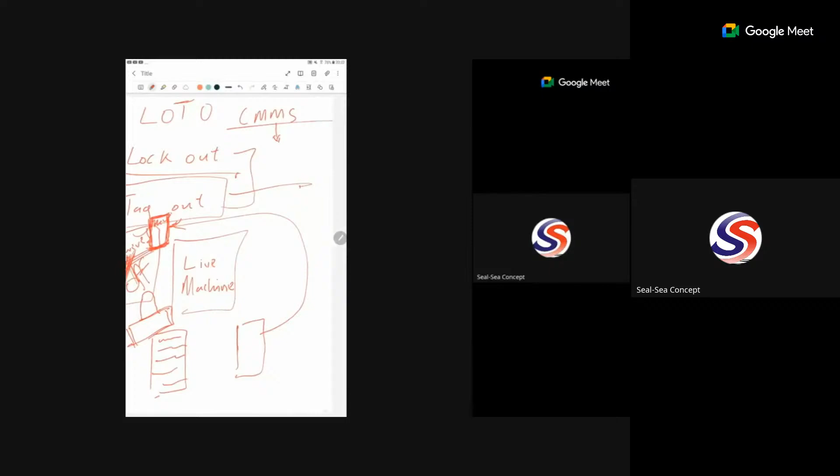Now, another thing, if you have that benefit in your company, I also want to talk to you about this. When you go to the field, you will see the push button to start the machine. This is usually big - the green one is to start, this is the stop, and this is the emergency.

If your company is fully automated, like most companies I've worked with, it means they don't have to come to this push button. Somebody just sits down in the control room and powers up the machine from a distance - it starts remotely.

So what happens when you come for maintenance, as an electrical person, mechanical person, or whoever, even after you have taken the line clearance and they have padlocked it and done everything - please, when you come to the field, make sure you activate this emergency switch or button. The use of this emergency button means that even if they want to power it up at the control room, the machine will not start. This actually cuts off electrical supply to the machine.

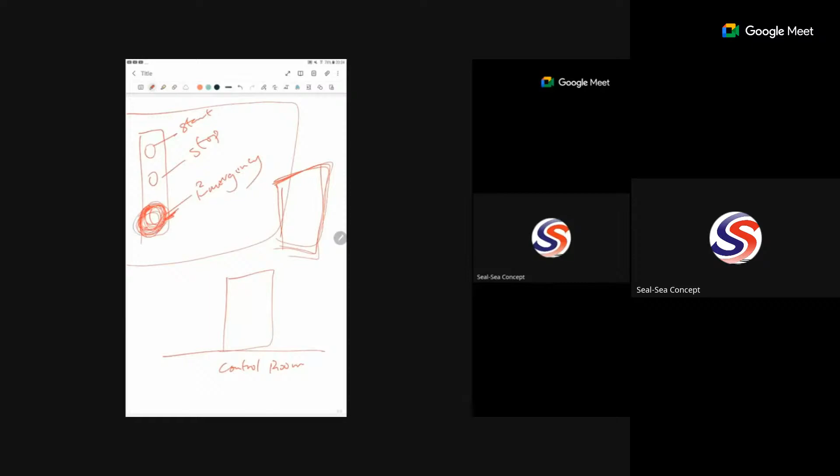But the only fault that many maintenance guys normally have across industry is that when they are not done with the maintenance, many of them forget to release this emergency button, and it eventually leads to downtime. Because if you did not release this emergency switch, and the control guy in the control room is not ready, they will have programmed the machine to start by, say, 8 p.m. When it's time to start, you will see an error beeping on its own, showing that there is an emergency switch already activated on this machine.

The time you use when they call your department because you forgot to release the emergency switch, the time you use to run from your office - in most cases, especially if you work in a large factory like I do, going from one line to another is like traveling within the factory, especially if you don't have an operation vehicle. The time you use from your department to release this emergency switch, trust me, you've used 10 minutes. That 10 minutes will be recorded to your department as time you caused, and you know the millions you have lost.

But all this actually helps you. If you activate the emergency switch, remember to release it when you are done. So this is how LOTO actually works. You lock out, you tag out - you must tag out, and then you must also lock it. Personnel must be trained on how to carry out LOTO across industry. It's very, very important.

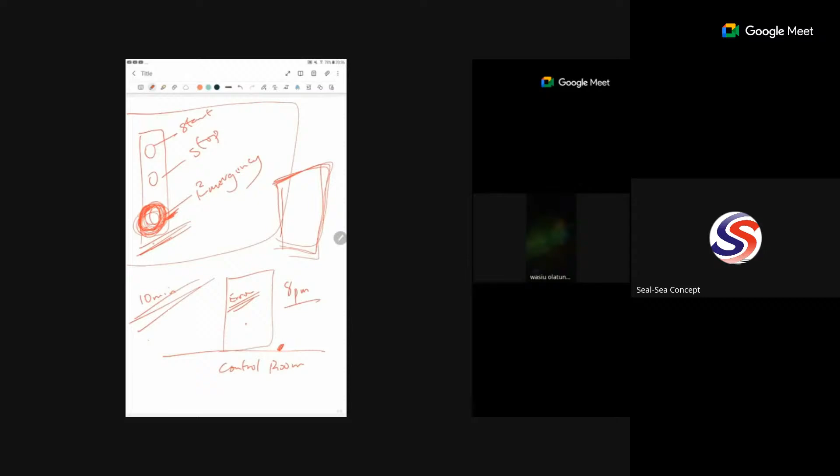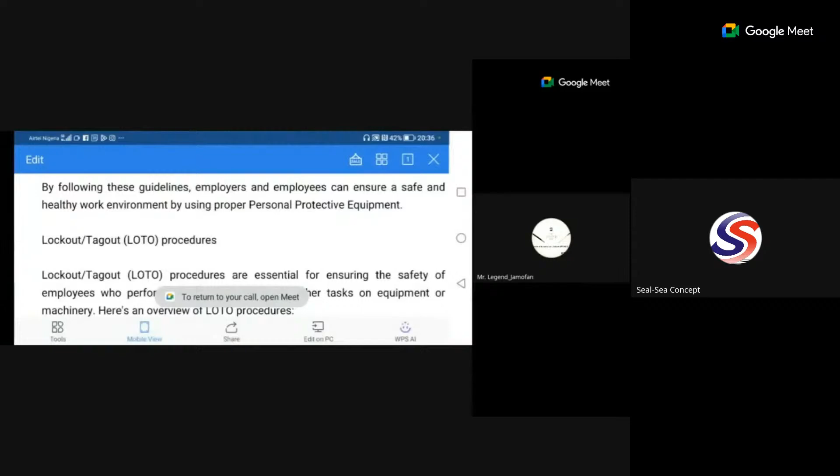If you understand what LOTO is now, please give me a thumbs up. Good, good. So if you have been doing it wrongly, please make sure you care so much about your own life, and go and correct it. Thank you so much, I love the thumbs you are giving me. So that is LOTO. I don't want us to have broken it down without more.

I explained this also yesterday, that on every machine there must be hazard identification. You must identify the hazard attached to a machine so that you know the level of risk when it comes to working on that machine.

Now, in calculating the risk aspect of a machine, you have to assess what is the probability that harm from that machine will occur, and if the harm occurs, what will be the severity? Let me give you an example.

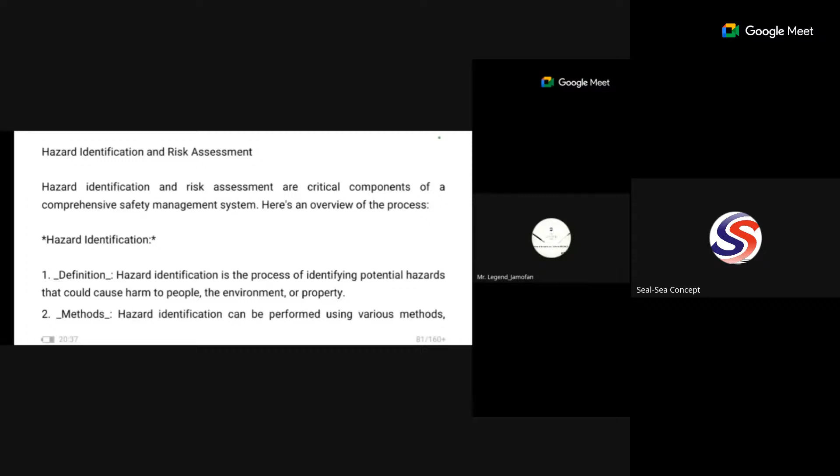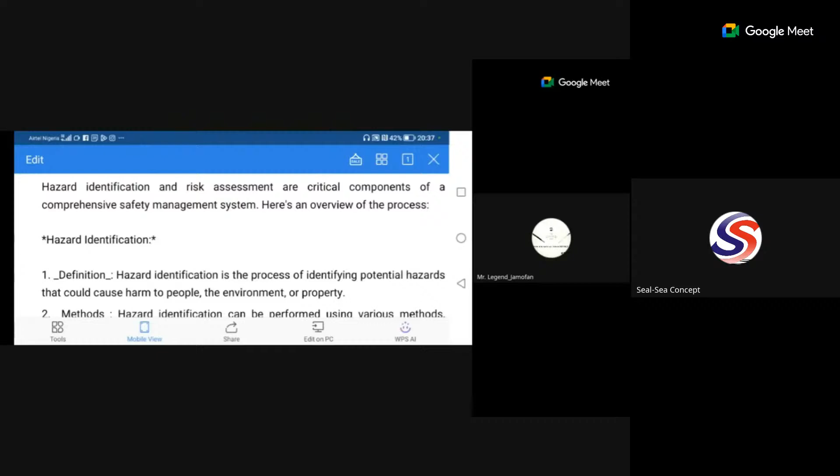I will use one person to assist me with this, one person who wants to volunteer. Don't worry, you're not doing anything difficult, you're just backing me up. Anybody that wants to volunteer to be my partner? Mr. Moderator, can I have hands up? Adekunle, are you willing to support the trainer in this? Yes, sir. Okay, thank you so much.

Thank you so much. So let's say we have a machine, and what we want to discuss is for us to know what we mean by risk assessment - briefly, we don't need to waste time on it, I just want to give a brief illustration. So this is a machine, and we perform hazard identification on it. We see that this part of the machine can cut somebody, and this part can also cut somebody - let's say part 1 and part 2. Both can cut. So this is what we now do.

We are going to know what is the probability. Many of us in math do probability - what is the likelihood? We know this thing can cut somebody, but what is the likelihood, what is the percentage assurance that it will eventually cut that person? And now, if it cut the person, what will be the severity - how severe will it be? Are you with me?

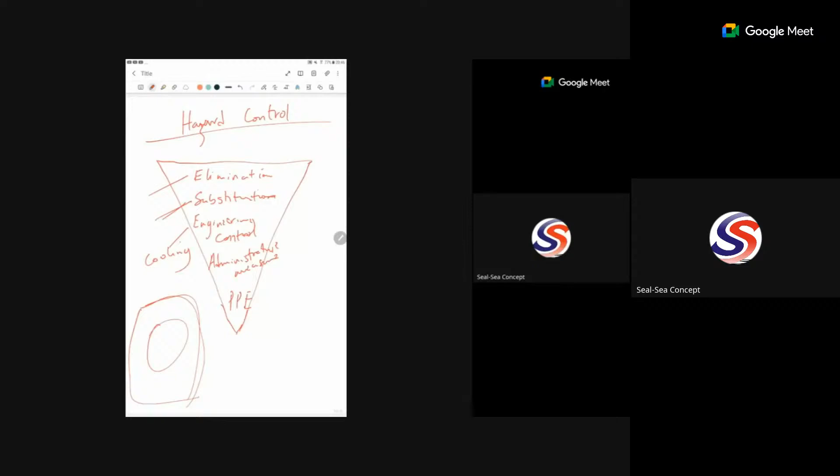Administrative control is implementing some policies, like LOTO, which is a policy - companies are so strict with it. Wearing your PPE is a policy. Some companies will call you to a disciplinary committee if you are caught. The safety personnel walk around the factory, and when they see you in a dangerous place without your helmet, where you're supposed to use one, they will take your picture. When they invite you to the disciplinary committee panel, they will show you your picture and ask what you were doing in that session without your helmet. If you are called more than once, it's possible you get sacked based on that.

Administrative control just means the rules and regulations of the company in order to reduce risk or hazard, or your interaction with the hazard in the factory. It's for you to adhere to safety. It goes beyond that, and if we've tried everything else, the last resort is your PPE. So maybe you should wear something that will protect you so that you will be safe.

Let me stop there tonight, I think I've covered much. Tomorrow I will move briefly to mention more of the mechanical aspect, then we'll talk about the rest.